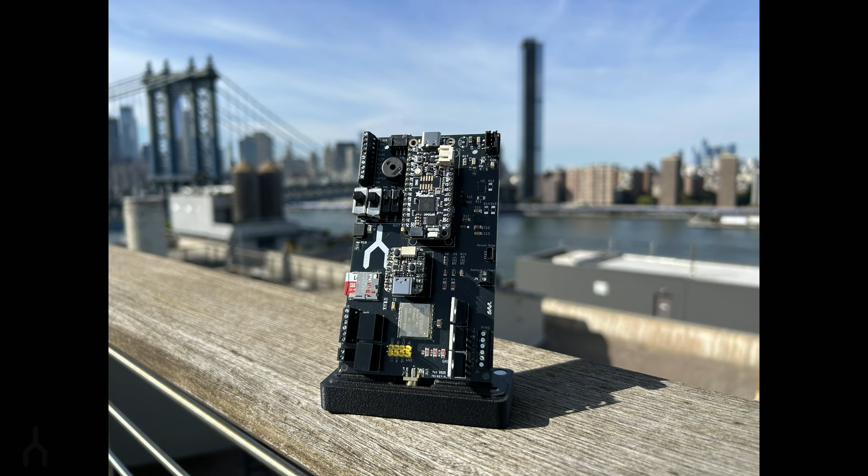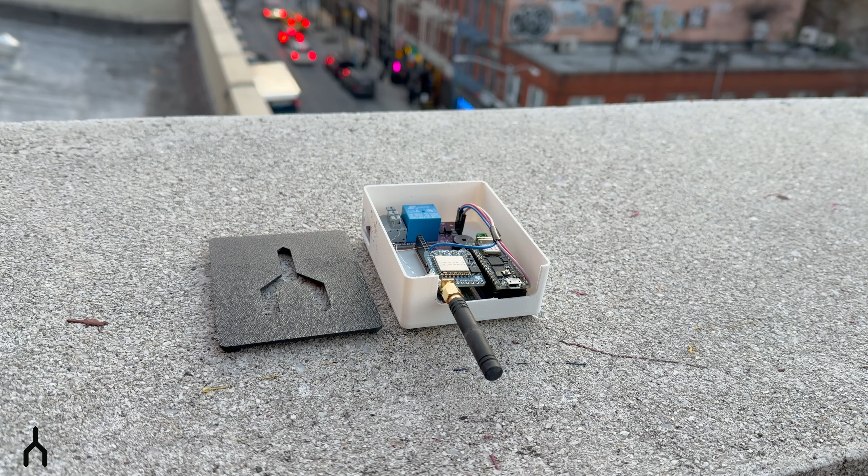The second objective was to design a flight computer that will control the rocket flight functions, like connecting to sensors and using this data to do live analysis in order to determine what stage of flight the rocket is currently in. Based on this state machine, the computer will then air start a second motor if certain safety parameters are met, deploy parachutes, all while recording in 4K and live streaming time series data to a base station connected to my laptop on the ground. The original time series data rate goal was 10 Hz, or 10 data points per second.

The next goal was to design my own PCB with all SMD components, except for the MCUs, because I had killed two RP2040s last year, and I was scared that if I did this to an SMD RP2040, that could be a really bad day in the field instead of being able to just go into my toolbox and grab another one of these and continue on.

And lastly, to have as close as possible to 100% unit test coverage for my code that runs automatically every time I push new code to the repo. And the main goal of this project was to just try new things and learn through doing. Have fun, launch some rockets, and hopefully get them back in the same shape that they left in.

This is horribly broken. Before we get into it, I want to talk a little bit about motivation, goals, and picking deadlines before you start your project. For me, I know that deadlines and pressure increase my productivity. This has also been shown by several psychological studies that the more pressure you have increases your productivity to a point, and then you have a meltdown, like I did in college. For me, I find that this pressure increases my productivity, even if the deadlines are arbitrary.

Also, I found many years ago that having an accountability buddy, like one of your friends that doesn't really do anything for the project, but just is willing to sit around and listen to you ramble about your progress for 20 minutes every week, but you tell yourself that they're holding you accountable and you can't let them down. This is really helpful. Your mind is a powerful thing and you can make it valuable.

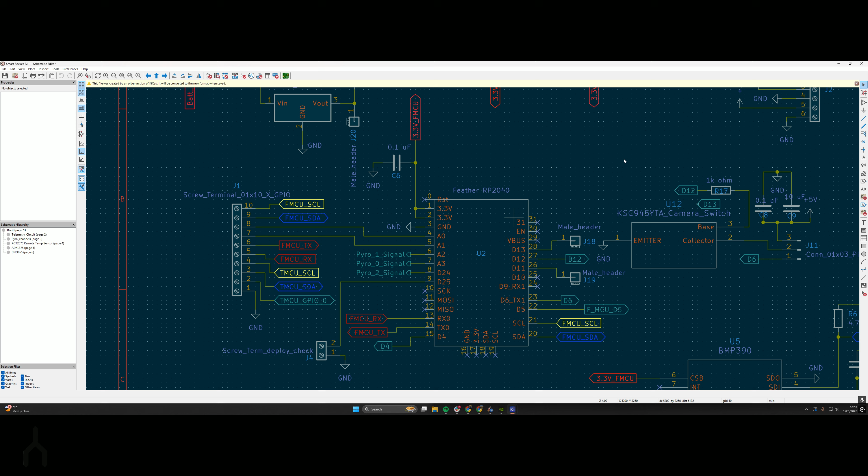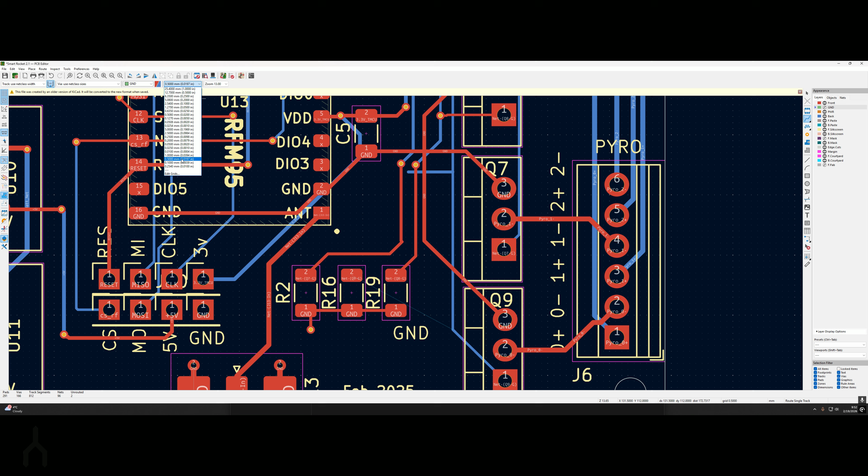I spent the entire month of November to December doing PCB design. I was still working a full-time job at this time, so I would come home every night at 6 o'clock and then start working. I would work from that time until 1 or 2 o'clock in the morning every single day for this month. I've had a lot of success with complete immersion in the past when you're trying to learn a new technical skill or complete a big project. I think that just dedicating every bit of your free time and energy into a project is the best way to get through it.

This project, like every project, has good design decisions and bad design decisions. And we're always limited by what we don't know. Something that was important to me when I started doing this project was that I had ideas on how some things could work, and I really wanted to try to explore those ideas and just see if I could do it rather than spending a bunch of time researching the most optimal or industry standard way of doing something and then trying to recreate that. Because I find that when I do that, I'll spend a ton of time going down this rabbit hole of reading books, reading blogs, watching YouTube videos, and then I won't really do anything. And it was more important to me to finish the project and have something that would work.

And if I was going to use this project for something like a portfolio or resume, I think that it's actually more important to be able to explain all of your design decisions and know the thinking of why you did it and how everything works rather than just kind of using ChatGPT or copying something you found online and having pretty much no clue what's actually happening under the hood.

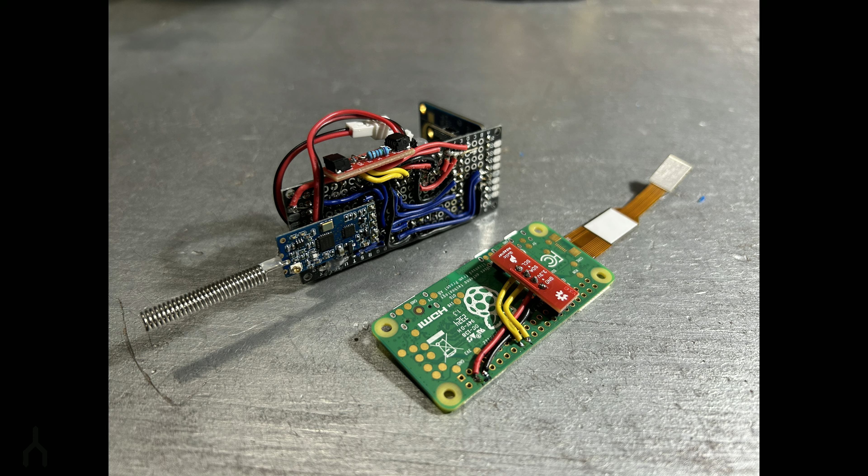I wanted to do a PCB for this project because I've only done things like proto boards before, and all of those projects generally have a lot of issues with shorts, just really weird electrical stuff going on. And if you need to make more than one board, it just takes forever and the results are really all over the place.

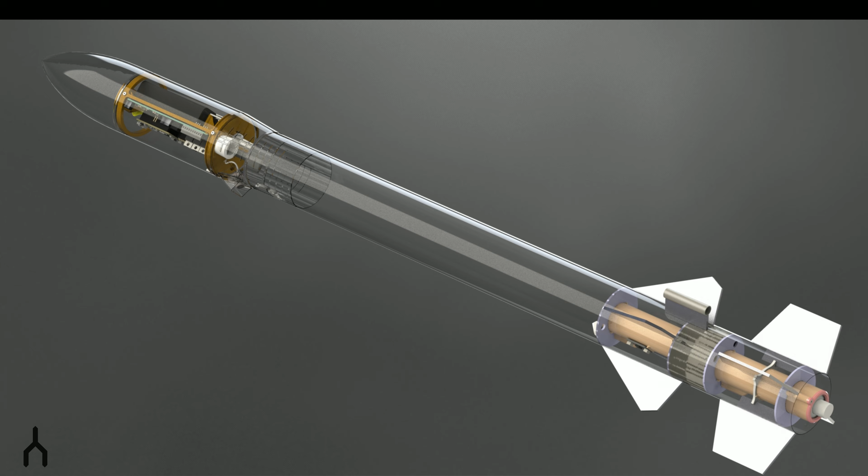Designing this rocket, there's a surprising number of decisions that you have to make, like how long the rocket should be, what fin shape to use, how the fins are constructed, and most importantly, how everything ties together into a structure that's both strong, stable, and serviceable.

Up until this point, my experience in model rocketry was building or modifying existing kits, which is very different from starting with a blank sheet of paper and trying to design a two-stage rocket that needs to be stable both with the booster attached and as a sustainer flying on its own. At the start, I honestly didn't know how to answer some very basic questions like how to size components or how the aerodynamics of a rocket even work.

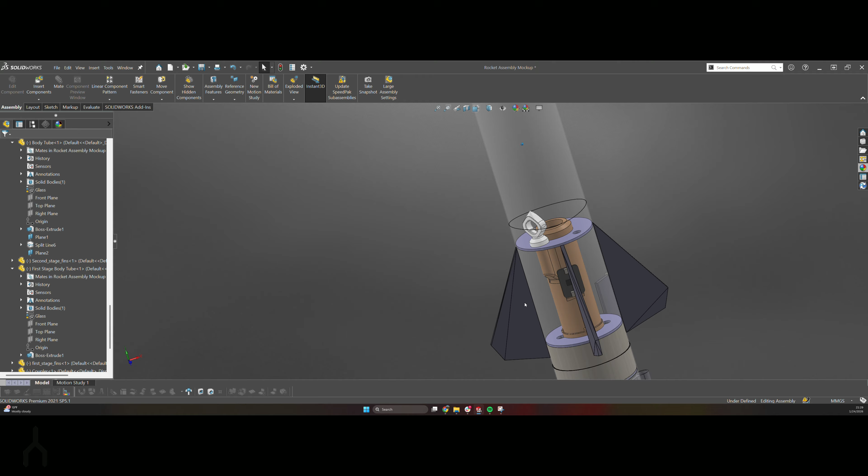Where I started was with this book called Handbook of Model Rocketry by Harry Stine and Bill Stine. The book is an excellent resource. It covers almost all the fundamentals you need to safely get started in model rocketry and high power rocketry design. The chapters I found most helpful were the aerodynamics of model rockets, why fillets are more important than you might think, proper fin construction and how to use fin jigs, and most importantly, for this project, how to approach the design of a two-stage rocket.

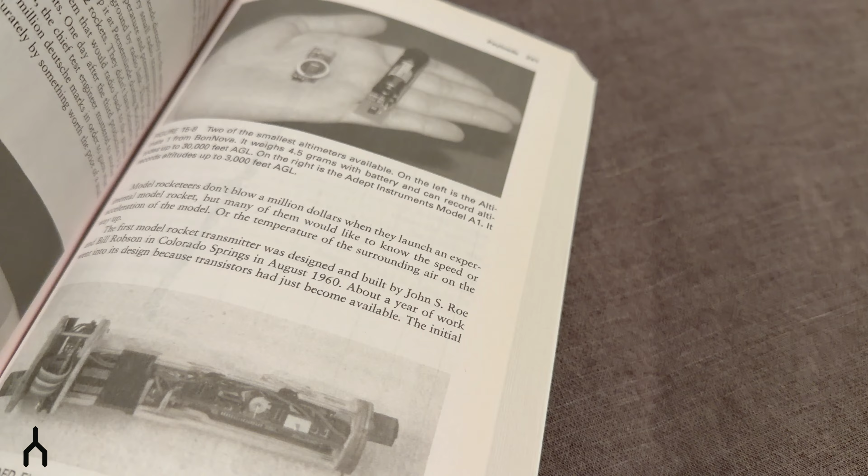Beyond this book, a huge part of my learning came from the online rocketry community itself. BPS Space was a massive inspiration. Joe's work really pushed me to take this project further, and honestly, it's a big reason that I decided to document the process at all. Thanks, Joe. And the guys from the Anti-Gravity group. They have a lot of neat podcasts that I've gotten a lot of little gold nuggets from and learned a lot. And Alex from Pittsburgh Space Command, who helped me do my L1 certification.

With this new knowledge in hand, I started working in OpenRocket to design the airframe in a very rough sense before heading into SolidWorks to actually begin the mechanical design. OpenRocket is an open source rocketry flight simulation and design tool. It helps you quickly design a rocket's geometry, materials, and motors, and then simulate flights to see things like stability margin, altitude, velocity, and accelerations.

As soon as I started laying out the model rocket, even with only a rough idea of the PCB size, shape, and battery choice, I realized that this was going to be a very heavy rocket relative to the lifting power that you can get with a low power rocket motor. This forced a number of compromises to ensure that the rocket could safely leave the pad. Compounding this, when I'd started this design, I had only ever flown Estes motors, so in my mind, rocket motors basically topped out around an F-15.

Hey, we're almost halfway done. Woo!

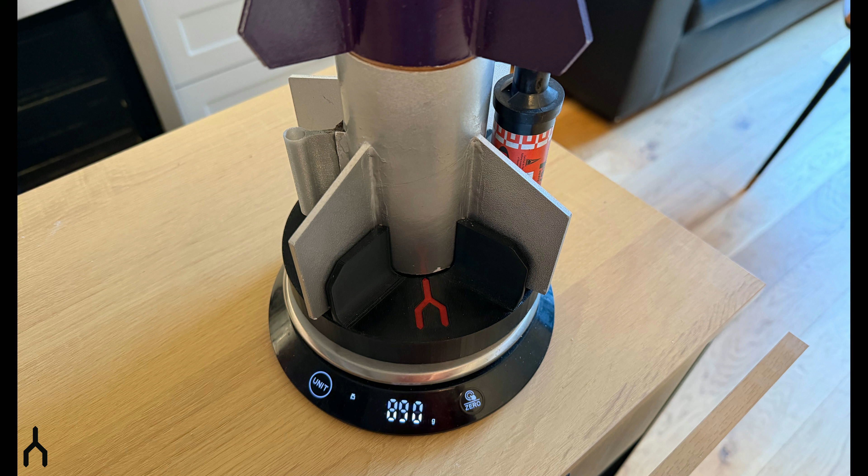Additionally, with the chunky batteries that I'd spec'd, this rocket comes to almost 900 grams fully loaded with paint, glue, hot sauce, and recovery gear. This was a very long way of saying that the rocket is really heavy, and the motors that I could buy at the time are relatively low power. So my only choice was to try and make the rocket as light as possible.

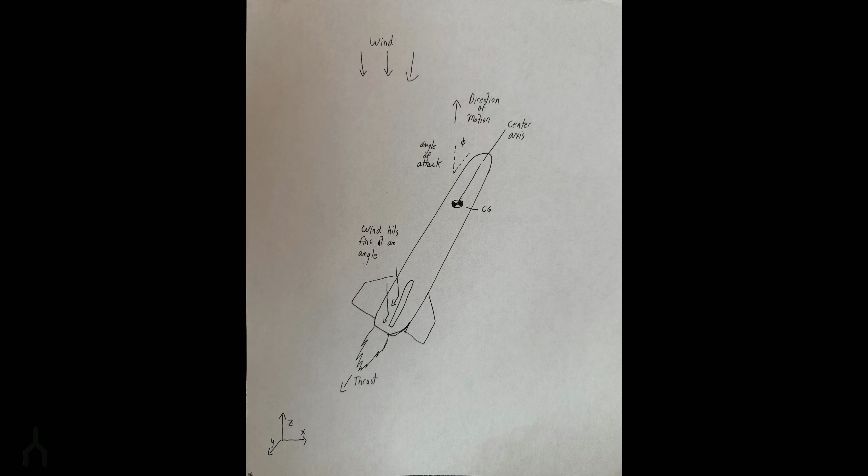The main issue is not that you can't get an F motor to lift this rocket off the pad, but you need to have the rocket traveling fast enough at the end of the launch rail that the fins can actually do anything. Rocket fins work by generating aerodynamic restoring forces. When airflow hits them at an angle, they produce lift that pushes the rocket back towards a stable and hopefully upright orientation. This is very similar to how a rudder on a boat also has a minimum speed where the rudder can maintain control authority of the vehicle.

A good analogy is sticking your hand out the window of a moving car. When you rotate your wrist, you change the angle between your hand and the airflow, creating a force and a torque that tries to move your hand up or down relative to whichever way you've rotated it.

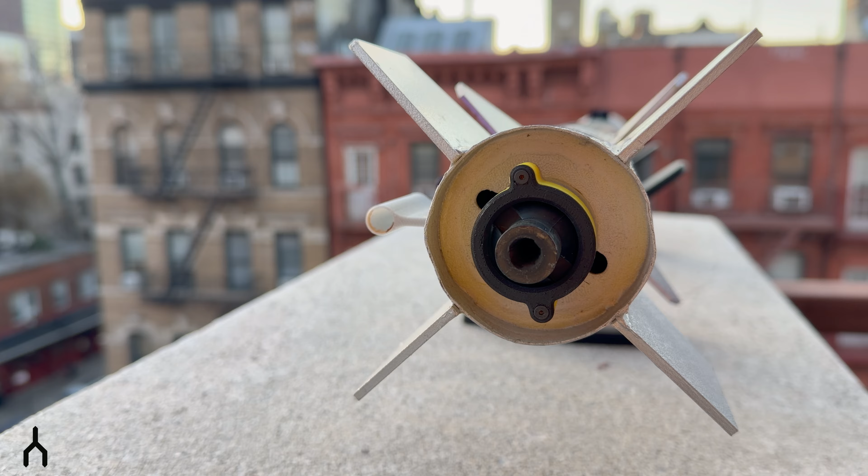Passively stabilized rockets like this one use symmetric fins to control pitch and yaw. Roll is usually not well controlled. Passively stabilized rockets often spin to fairly high roll rates due to small fin misalignments.

Once you have your rocket's mass, and it's modeled fairly accurately in OpenRocket, you need to make a few assumptions, and then other things become a fairly deterministic physics equation, with small tweaks along the way. I had access to a 40-inch long, quarter-inch launch rod. There's a lot of options online, but I decided that a safe target to reach was about 40 feet per second at the end of the launch rod. That rod exit velocity became my primary design constraint.

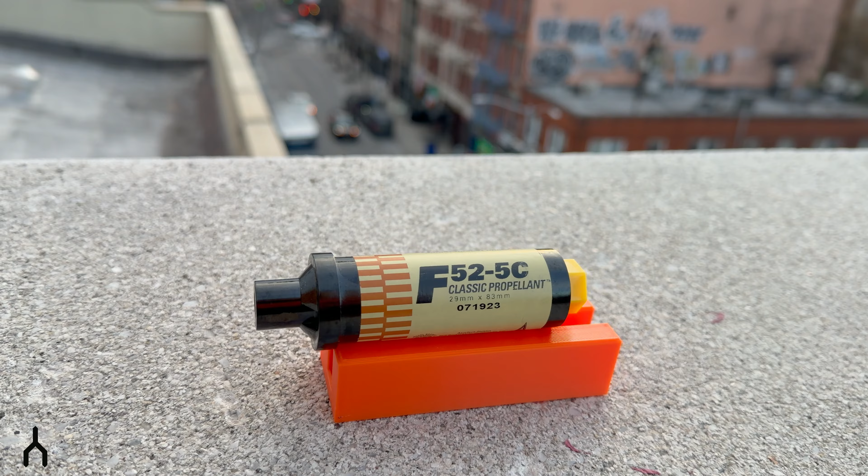There's a lot of different rocket motors out there with different thrust curves. Some rockets are really punchy right off the bottom, with a very high impulse over a very short burn period, and some rockets actually have a much longer burn with a lower average thrust. What I went with for this was the Aerotech F52 motor for the lower stage, the booster, and then for the upper stage, I went with the Estes E16-4.

I went with a much lower powered upper stage motor because the whole point behind this rocket is not to go as fast or far as possible, but I just want to do a two-stage rocket. I want to prove that I can do it. Can I design a flight computer that can record video, record data, can it ignite the second motor in the air, and then can I get everything back again?

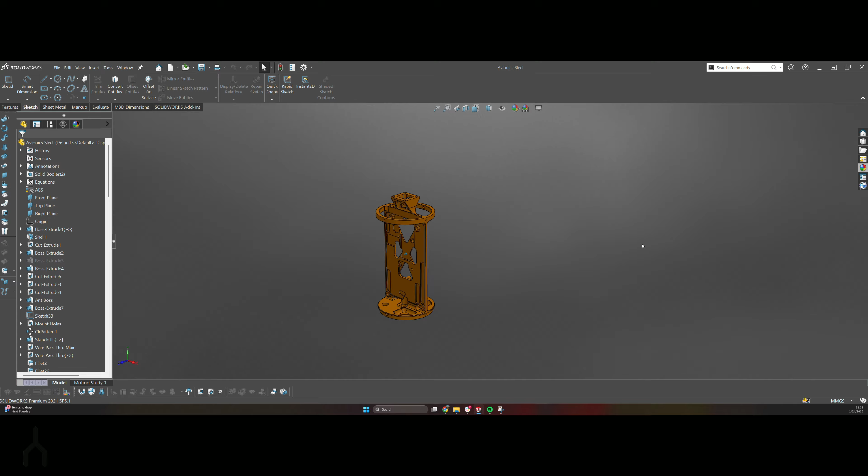Now, on to the mechanical design for this project. This is actually my favorite part. I love mechanical design. I think that doing CAD is like playing an extremely slow-paced video game. So I tried to make the sled that all of the avionics sit on as light as possible by adding all of these pockets and lightening holes through them.

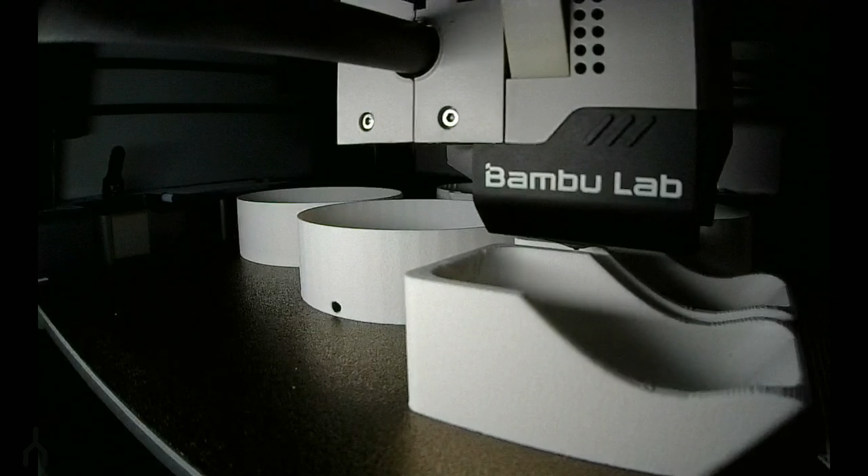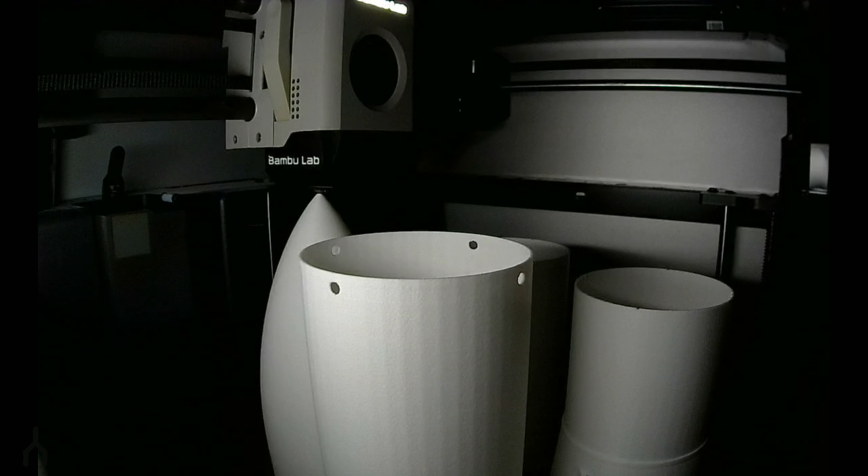And it's actually pretty flexible in bending, but everything really stiffens up a lot once you bolt on the nose cone, which is modeled as two pieces and then bonded together after for ease of printing. It's only 2 walls thick, so with a 0.4 millimeter nozzle, this ends up having a wall thickness of 0.8 millimeters for this skin. And then the camera sits underneath this bulkhead.

And that's another really awful design decision that I wish I could take back. I've tried to make use of this transition period to get a better angle, to get this camera aimed down so that we could see the fins when the rocket flies. But the problem is that underneath this bottom bulkhead is a pressurized zone that you pressurize with a pyrotechnic charge to get the nose cone off to deploy the parachutes.

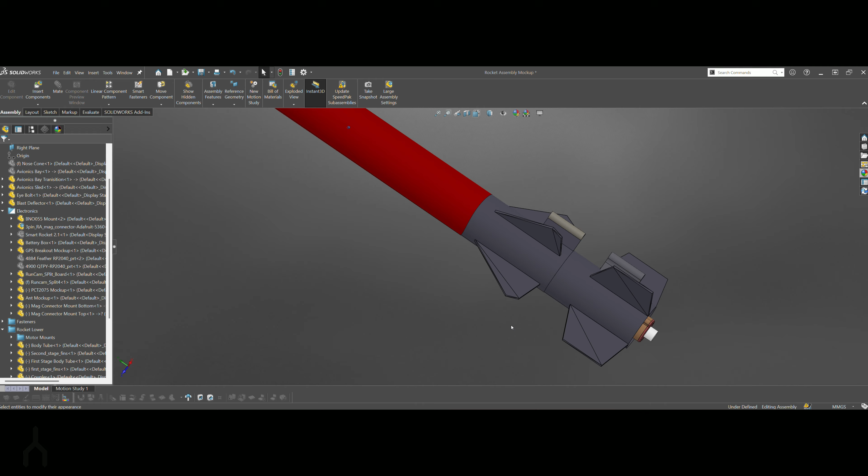And you have this sensitive camera with these flames and high pressure and lines that are getting pulled taut when the nose cone deploys. It's really not a good choice, but it was a constraint that I couldn't work around any better than this at the time. And then we come down to the motor mounts. I designed them in a bunch of different pieces, and they all bond together.

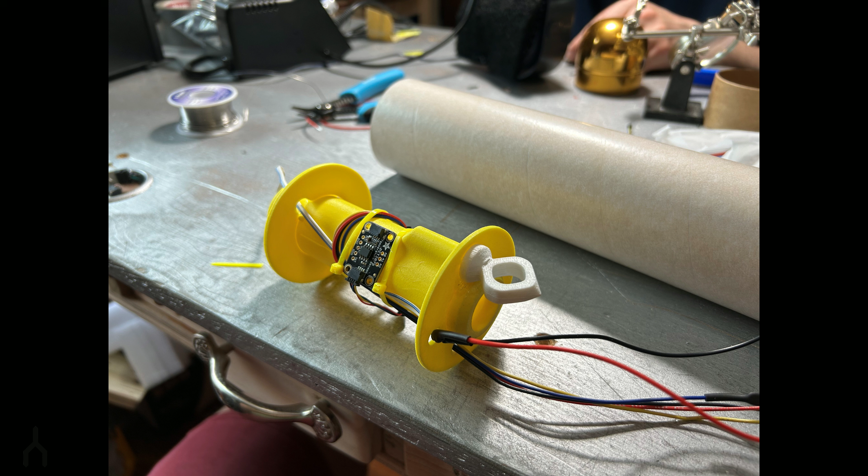Another issue is that I wish I had done through-wall fins on the upper section of this rocket. I had just been learning about them at the time that I was doing this design. I was just learning about their importance, and I somewhat implemented it on the lower section, but I didn't tie it through all the way. So the lower fin can for the booster is actually pretty strong. It's very stiff, but the upper section just has fins that are CA glued on. I have broken several of these just in transport or when this rocket had a hard landing before.

Also, one more note about the fin cans on the lower, the through-wall fins. It also makes it so much easier for aligning the fins. I did use a fin jig to align them, but you don't even need a fin jig if you have them slot into a 3D printed recess for them. So, tip out there for you guys. Keep that one.

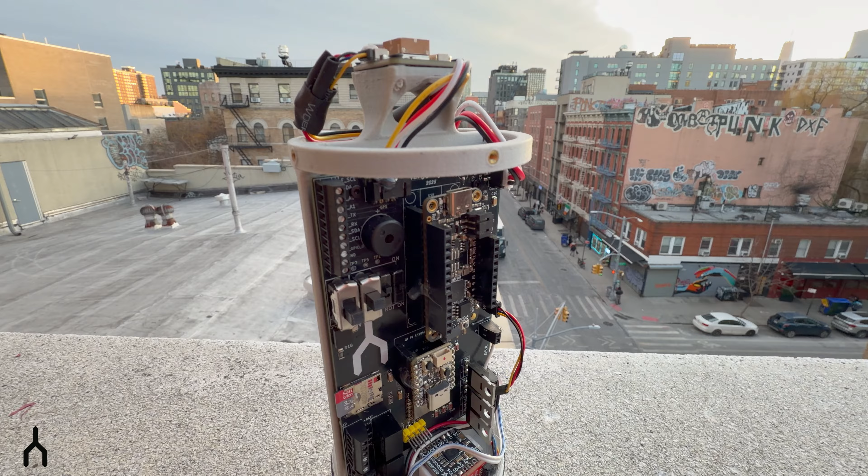Then, as we travel up to the avionics bay, which I'm particularly proud of, the V2.1 rocket board is 2.9 inches wide, and with the wires installed in the screw terminals, the clearance is just perfect as you install the nose cone. Okay, let's talk about some good and bad design decisions.

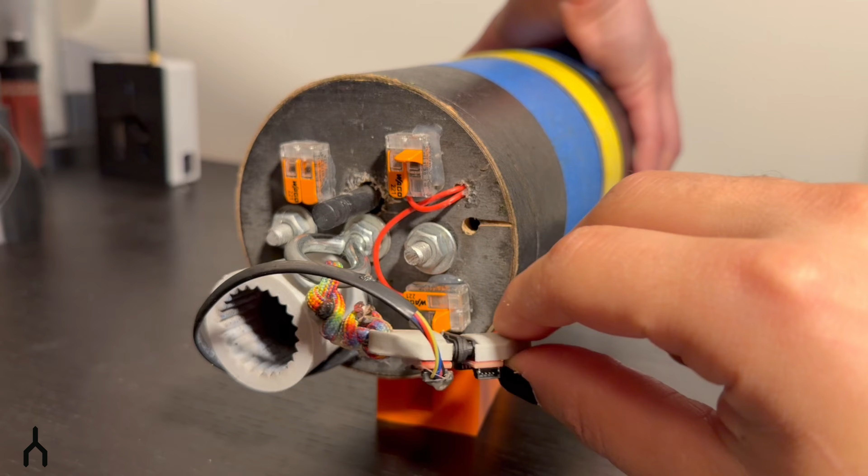The motor mounts ended up being strong and very easy to work with. I'm really happy that I used connectors like the JST PH and SH line for ease of swapping boards and components. The magnetic connectors that I used to connect to a remote temperature sensor and also to a deployment check switch ended up being pretty bad. They were not strong enough. They fell apart multiple times in different ways.

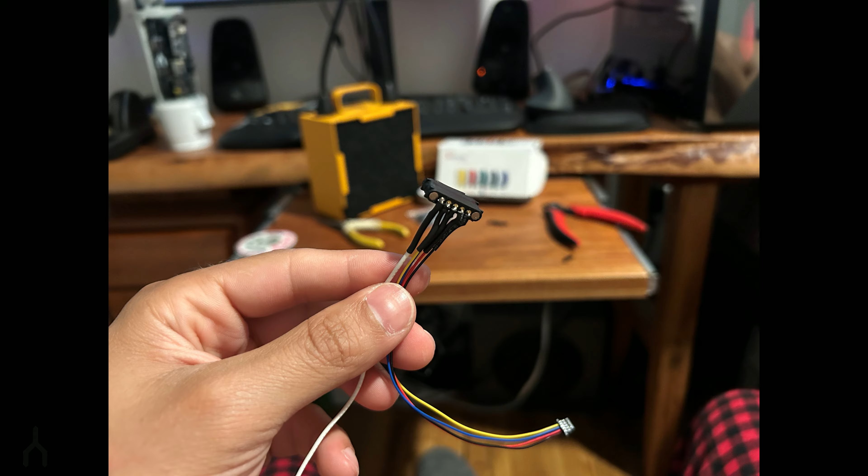Sometimes you would put the nose cone together and get everything ready and prepped, put it on the launch pad, and they would just come apart sitting there so the rocket wouldn't arm, it wouldn't pass the pre-flight check. Had no idea what was going on, had to stop, take apart the entire rocket.

Another bad design decision was using these 8 M2 bolts to hold the AV bay on to the rest of the rocket. These are tiny, and when you're standing in a field trying to operate a tiny little wrench to take things apart, they're flying all over the place, and the walls are really thin. It takes too much time to try and operate these.

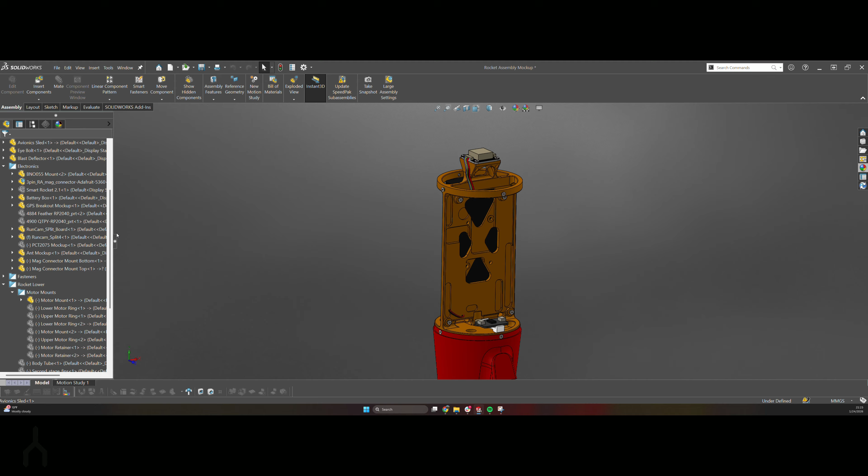And one of the worst design decisions about this rocket that I just wasn't aware of at the time is you need to be able to arm your pyro charges while the rocket is in as safe a position as possible, on the rail, pointed up. But this pyro arming switch is inside that nose cone, and it's just a slide switch that's on the PCB.

So that means to prep this rocket to be ready to go, I have to arm that switch with everything open, with the PCB exposed, and then I have to carefully and quickly put in these 8 M2 bolts, all while having this rocket just sitting on a table in front of me, and then I have to carefully run over to the launch stand, put it on there. Really dangerous. It's always a scary moment when your code is in control of the pyros.

Not a good choice. Luckily, I already fixed that in the next version of this design, which uses screw switches that you can access with a screwdriver through the outer wall of the rocket while it's on the launch pad. Much safer position to be in.

Okay, batteries. The system idles at 400 milliamps and draws about 600 milliamps during flight. My requirements specify up to 6 hours of idle time followed by 10 minutes of runtime, even though the actual flight should only be about 60 seconds. At a nominal system voltage of approximately 7 volts, this corresponds to a total energy requirement of roughly 18 watt-hours,

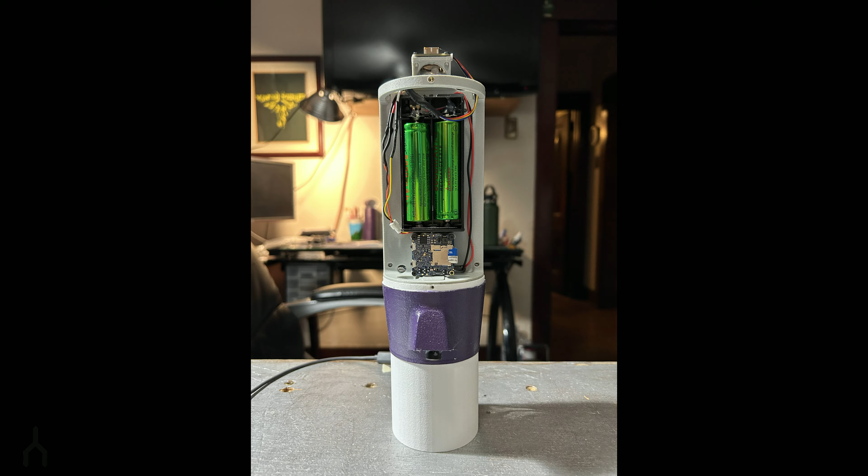including some margin. Based on these requirements, I selected two 18650 lithium-ion cells in series, providing a nominal voltage of 7.4 volts. Assuming the cells are around the 3.5 amp hour range, this configuration delivers approximately 21 to 26 watt hours of energy, which reasonably satisfies my original requirements.

Cheap components from Amazon. Don't buy electronic components from Amazon. Buy them from DigiKey or Mouser or someplace that sells higher quality components. On this rocket, every component except one was not from Amazon. This is some foreshadowing here. This single component caused a failure on the first flight of this rocket.

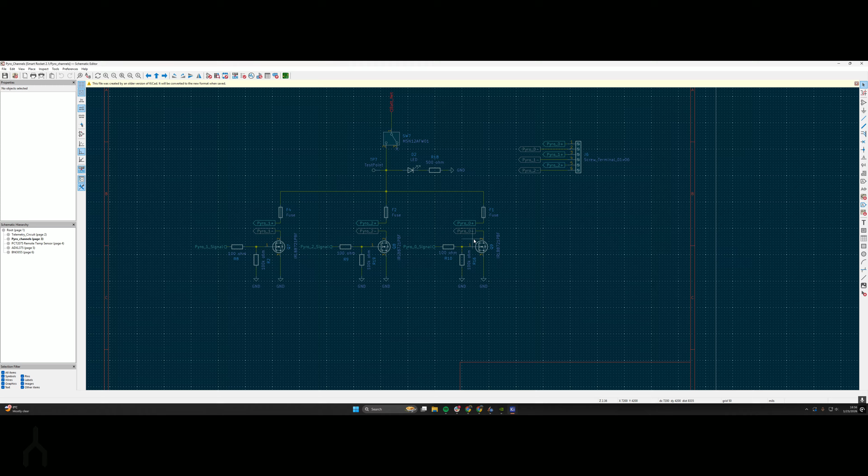The one part I bought from Amazon was this battery box, which I modified, replacing the 28 gauge wire with 20 gauge wire and hot glued everything together. This is a great segue to the first launch, but first, let's talk about pyro channels and code. This board has 3 pyro channels. Technically 4, as the same low-side MOSFET is used to provide the camera with power.

Channel 0 is wired to a firewire in a 1 gram black powder charge mounted to the underside of the AV sled bulkhead. It sits in a 3D printed cup, and in testing, I found that it was completely sufficient for my use case to just fill the cup with black powder and hot glue a lid on the top. There are a few black powder calculators online that you can use, but with my rocketry friend, we just tested a bunch of different values and 1 gram seemed about right.

Thanks, Fletcher, for all the help and letting me set off all these bombs in your backyard.

The second pyro channel is wired to the second stage motor, and a third is used as a backup pyro channel for the main chute in case the first pyro channel fails. Redundancy is a big thing in aerospace, and you should expect and plan for failures. I'm going to be going into detail on the code architecture in the rocket board video, but here we're just going to stop and talk about a couple of the safety features and the code that governs the second stage ignition.

This is a 2-stage rocket. After the first stage burns, we assess if it's safe to ignite the second stage. Then we air start the second motor with a firewire that is plumbed through the rocket airframe. After the first stage has burned and we begin the stage 1 coast, the most important thing we care about in deciding if we should ignite the second stage is where the rocket is pointing.

You can imagine that if the rocket is pointing in any direction besides almost straight up, it's not likely to be safe to continue, and the flight should be immediately aborted. What does it mean to abort? It means that we do not ignite the second stage. It means that we just pop this parachute pyro charge, aborting the flight, trying our best to get the parachute out to salvage the rocket, and hopefully minimize any other damage to anything else that the rocket could be heading towards because it's not going up.

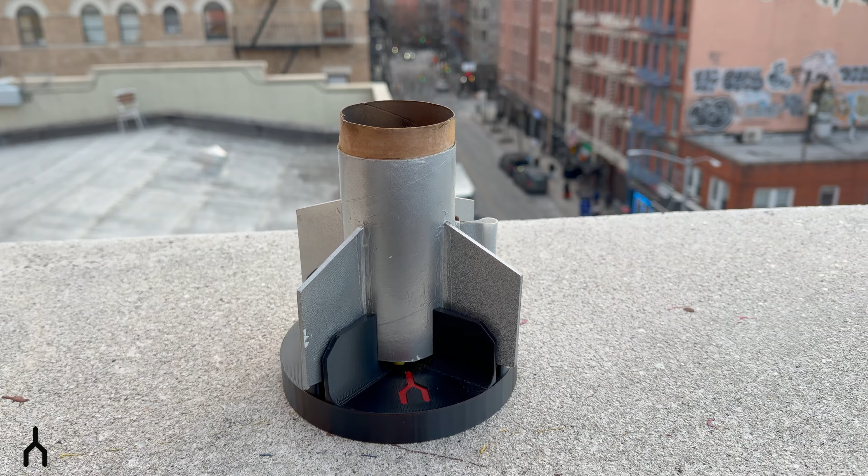Secondly, the launch lug, which was attached only to the sustainer so that it could be flown as a single stage, was not a through-wall component. It was only bonded to the outside of the tube using CA glue. After a quick redesign and a little rocket surgery, I was confident that we were not going to have the same mistake again.

December, the last chance to finish this project in 2025. If I didn't succeed with this attempt, I was going to have to leave my tribe and wander off into the jungle, alone. Everything was riding on this. It was a big moment, and it worked. Everything worked. It was a very emotional day.

It was -2 degrees Celsius or 28 degrees Fahrenheit, with freezing wind gusts up to 14 miles per hour. These are pretty terrible conditions for a launch day. The wind chill was so bad that after a few minutes of your hands being out of your gloves, they would turn red and go numb, making it almost impossible to articulate the 8 M2 bolts needed to assemble the AV bay. But through a mixture of luck, better preparation, testing, and whey protein powder, everything just barely worked.

2, 1, go! Woo! Oh, yes! The second stage is going! Yes! Come on, pop that parachute! Parachute's out! Dude! Oh, I think it's gonna land. We did it! We did it! Yes! Yes! Yes! My God! Oh, that feels so good!